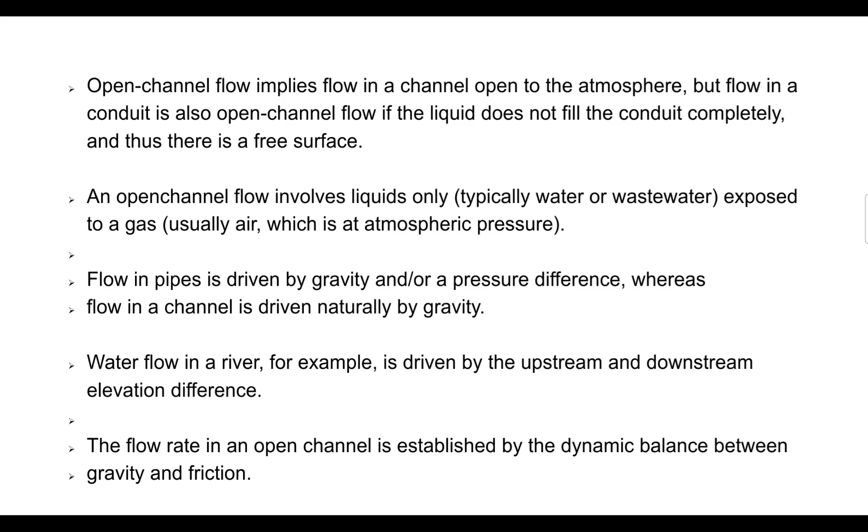So water flow in a river, for example, is driven by upstream and downstream elevation difference. The flow rate in an open channel is established by the dynamic balance between gravity and friction. The reason why there is flow is because of gravity, and the reason why there is resistance in flow is because of friction.

But the height of the free surface from the channel bottom, and thus all the dimensions of the flow cross section along the channel, are not known, so they can change along with the average flow velocity.

The vertical distance between the free surface and the channel bottom, in most cases in natural flow or natural waterways, is not known. Most of the time that's what we solve, or we can measure it physically, but it is a dynamic parameter, so it will change depending on the velocity of the flow.

So that's what's different, whereas in the pipe, there's no depth of flow because the pipe is completely filled with the fluid.

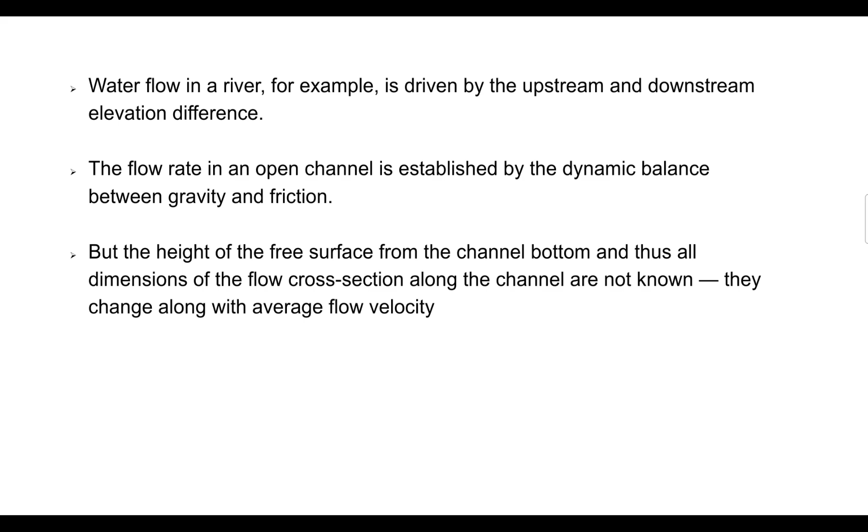In an open channel, the flow velocity is zero at the side and bottom surface. So the flow is zero at this portion. Theoretically zero, the flow on the side. Then it will increase as it gets farther from this side, so the velocity becomes larger. This is actually the velocity gradient of the flow in a typical trapezoidal channel.

The flow is zero because of the no-slip condition in the channel. We discussed that earlier, in the early part of this course and in the previous topic, because of the no-slip condition, because of the resistance of the friction between the water and the wall of the channel. The wall shear stress varies along the wetted perimeter at a given cross section and offers resistance to the flow.

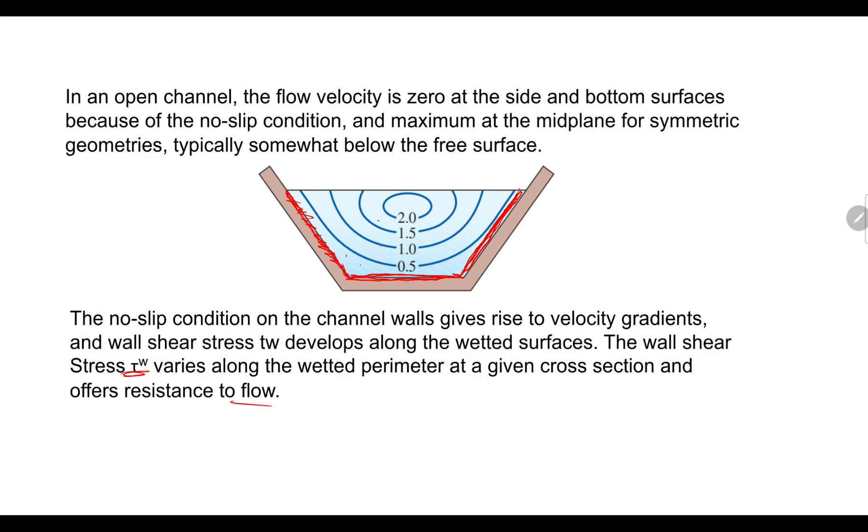The magnitude of this resistance depends on the viscosity of the fluid as well as the velocity gradient at the wall surface, which in turn depends on the wall roughness. So the friction resistance depends on different factors such as the viscosity of the fluid, the type of the fluid, velocity gradients, and of course the wall surface, because the rougher the surface, the more resistance there is to the flow.

Open channel flows are also classified as being steady or unsteady. A flow is said to be steady if there is no change with time at a given location, meaning no change in velocity at a given location over a period of time. The representative quantity in open channel flow is the flow depth or the flow velocity. So if there's no change in flow depth or velocity, the flow is said to be steady. Otherwise it is unsteady.

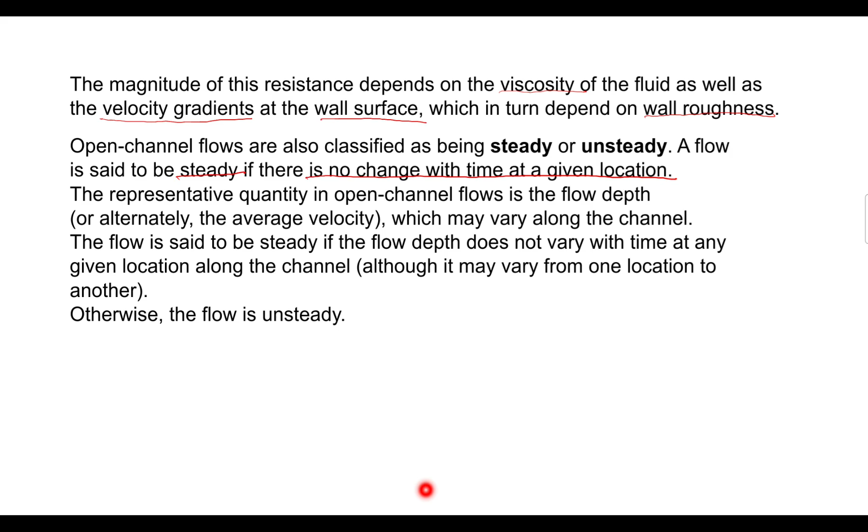Flow in open channels is also classified as being uniform or non-uniform, also called varied flow. This depends on how the flow depth changes with distance. The depth is the vertical distance from the free surface to the bottom of the channel. Depending on the flow depth, we can consider it as uniform or non-uniform flow. The flow in a channel is said to be uniform if the flow depth remains constant. Otherwise, the flow is said to be non-uniform or varied flow, indicating that the flow depth varies with distance in the flow direction.

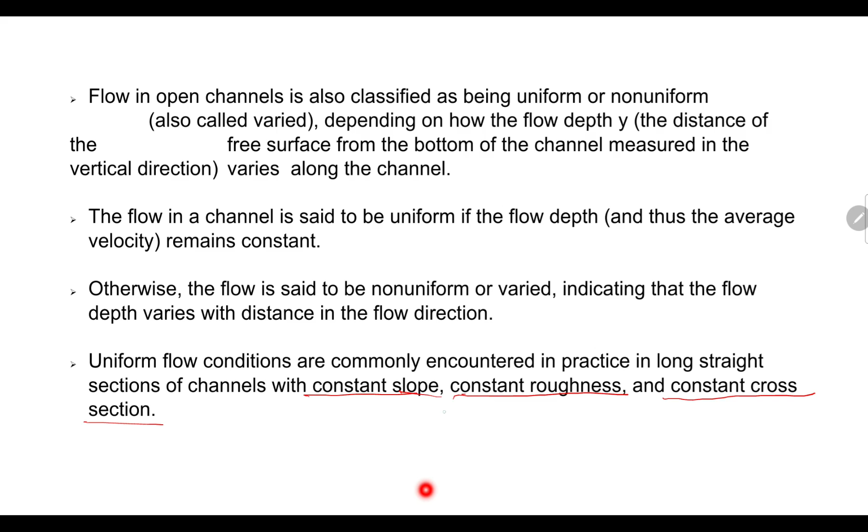Uniform flow conditions are commonly encountered in practice in long straight sections of channel with constant slope, constant roughness, and constant cross section. If the channel has these characteristics, most likely its flow will be constant, so its Q will be constant. So Q1 is just equal to Q2, or Qn, depending on what point we consider.

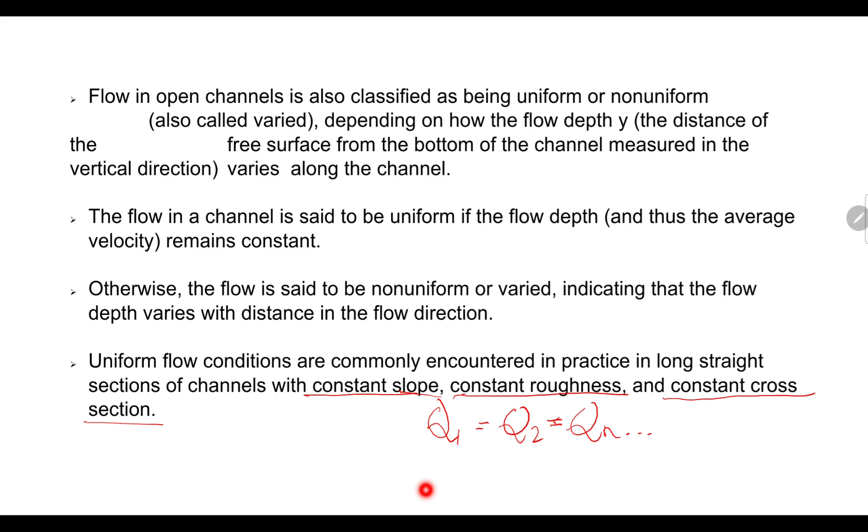In open channels of constant slope and constant cross section, the liquid accelerates until the head loss due to frictional effects equals the elevation drop. So as I've said, the flow is a balance between the gravitational effect and the flow resistance. There will come a time when they equalize, called the terminal velocity, so the velocity becomes constant and the uniform flow is established.

The flow remains uniform as long as the slope, cross section, and surface roughness remain unchanged, so most likely the flow will be uniform. The flow depth in uniform flow is called the normal depth, y sub n, which is an important characteristic parameter for open channel flow.

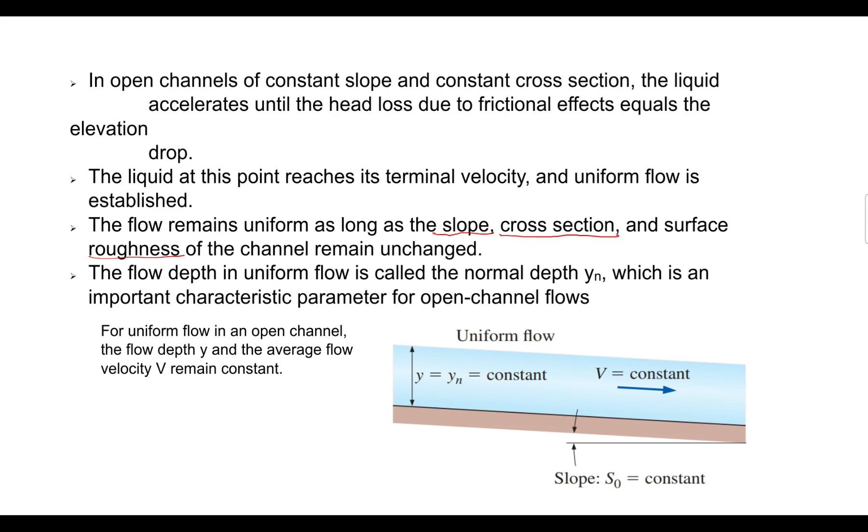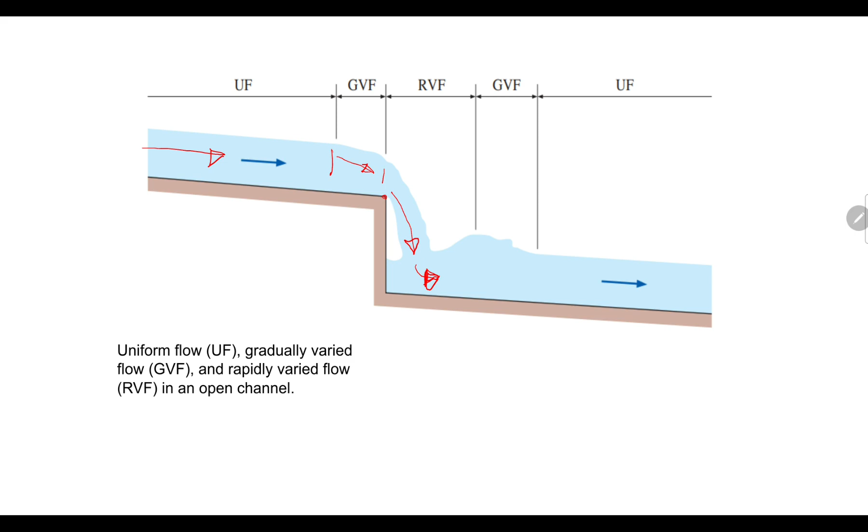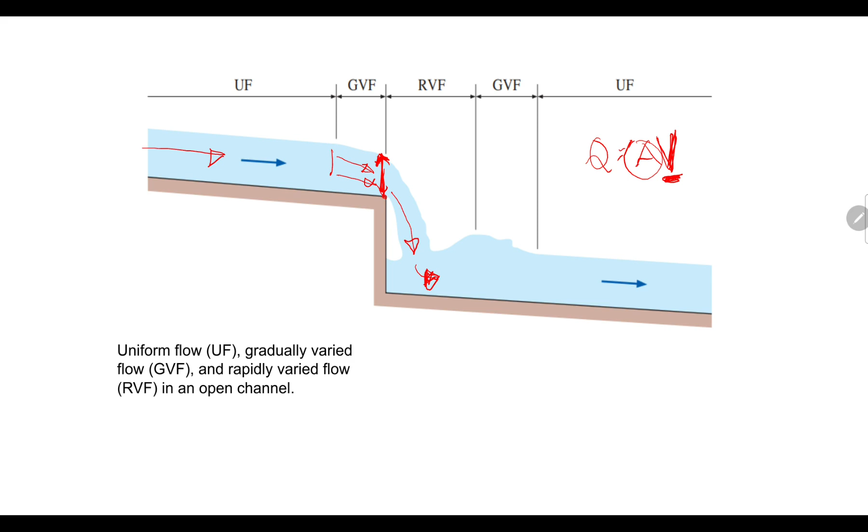We know that Q is equal to area times velocity, so the area is inversely proportional to the velocity. The greater the velocity, the lesser the area. That's why if the velocity increases, the depth decreases, meaning the area decreases. So if the velocity increases, there will be a decrease in area. This portion is what we call the hydraulic jump.

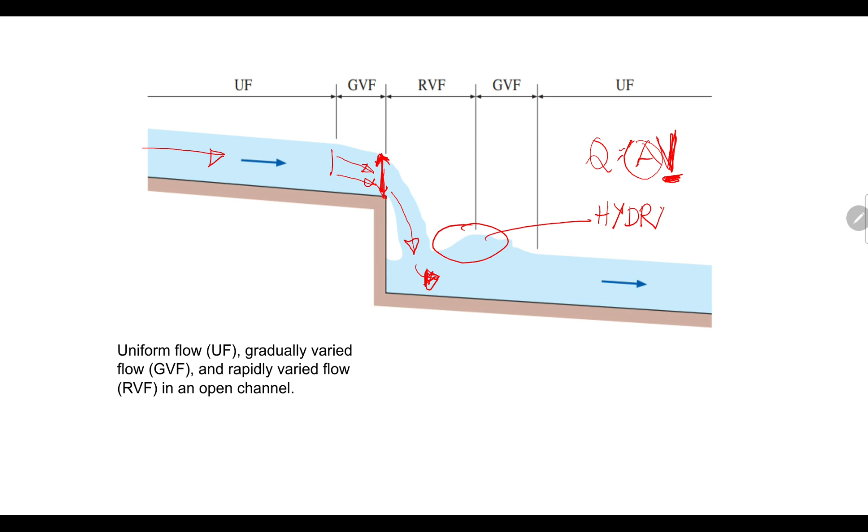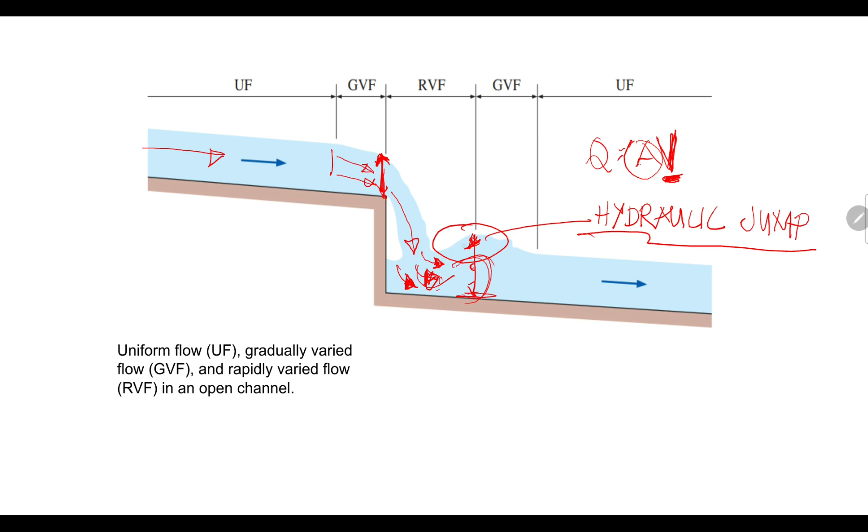Hydraulic jump phenomena occurs when there's a sudden change in velocity, or a sudden decrease in velocity. If you observe, the velocity here is comparatively bigger than in this portion. So the velocity is fast, then there's a change in momentum at this portion, and it suddenly becomes slow.

Because the velocity suddenly decreases, there's a sudden increase in area, so it suddenly rises. That's called a hydraulic jump. From this depth, it suddenly rises, and then going downstream it will normalize again, returning to its terminal velocity as it flows downstream, until the sudden change in depth levels out. That is the hydraulic jump phenomena.

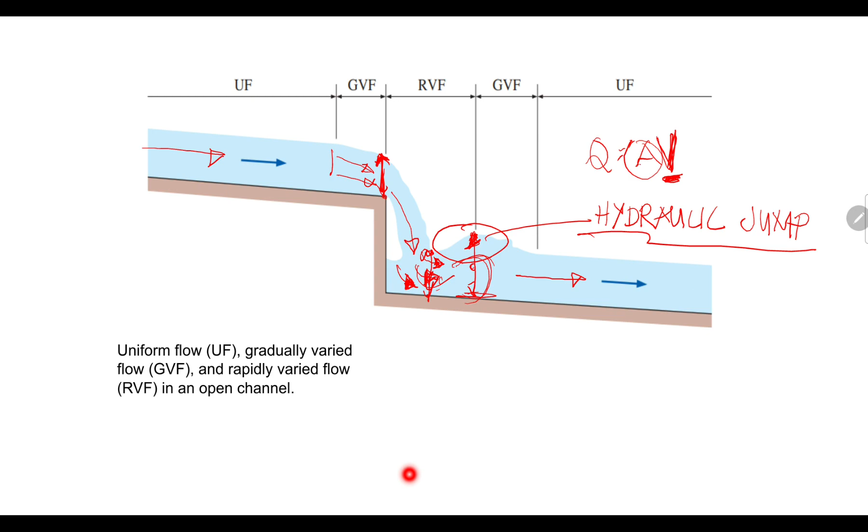Like pipe flow, open channel flow can be laminar, transitional, or turbulent depending on the value of the Reynolds number. The Reynolds number, as discussed previously, is a function of density, velocity, diameter, and dynamic or kinematic viscosity. In an open channel, instead of the diameter, we consider the hydraulic diameter or hydraulic radius.

Hydraulic radius, RH, is the ratio of the area to the wetted perimeter. If you have this channel, this is the wetted perimeter, or the length that is wet. This is the cross-sectional area. So hydraulic radius is the ratio of the area and the wetted perimeter.

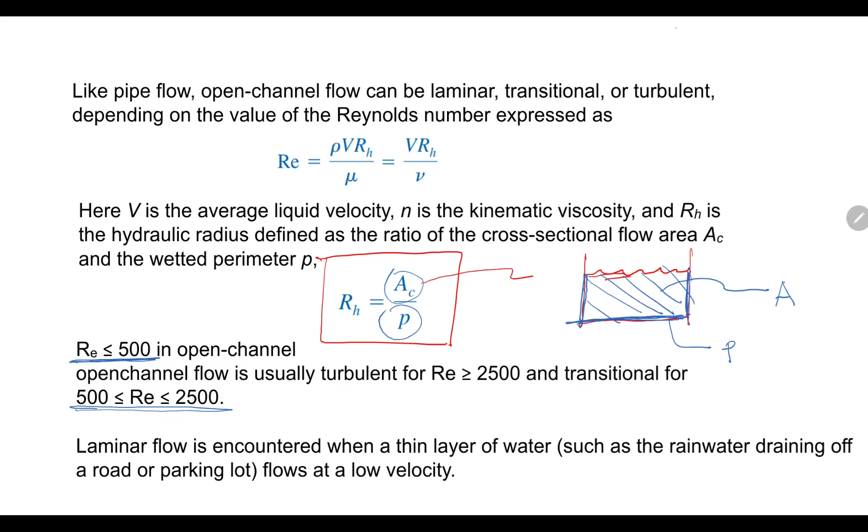If Reynolds number is less than 500, it's laminar flow. Between 500 and 2,500, it's transition flow. If it's above 2,500, greater than 2,500, it's turbulent flow.

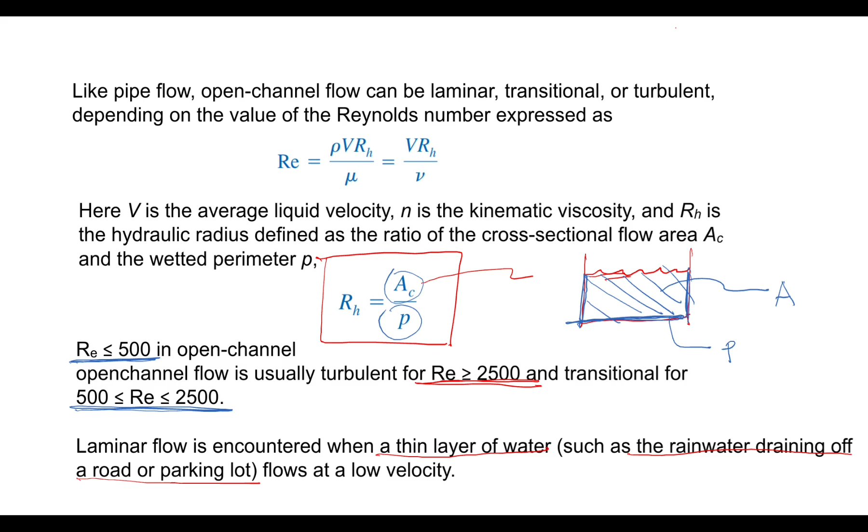Laminar flow in an open channel is very rarely encountered. It doesn't happen often. In most cases, laminar flow occurs when there's a thin layer of water, such as rainwater draining a road, a parking lot, or a similar situation, flowing at very low velocity. But in other flows, such as channel flows or flow in culvert pipes - like flow in a river - laminar flow doesn't happen; it's usually turbulent flow.

In an open channel, flow is also classified as subcritical, critical, and supercritical. The determining factor for that is the Froude number. The Froude equation is velocity over the square root of G times LC, where LC is the characteristic length. LC is taken to be the flow depth Y for a rectangular channel.

The Froude number is an important parameter that governs the character of flow in open channels. The flow is classified as subcritical if the Froude number is below 1, critical if it's 1, and above 1 it's supercritical or rapid flow. We need to classify the flow because in some topics this classification is important. As much as possible, we need to keep the flow critical or subcritical, because supercritical flow has a lot of energy in it.

As much as possible, in an open channel or hydraulic structure, we must see to it that, in most cases, the flow affecting our structure is minimum as much as possible, because high velocity packs a lot of energy. So as much as possible, we need to have minimum energy impacting our structure.

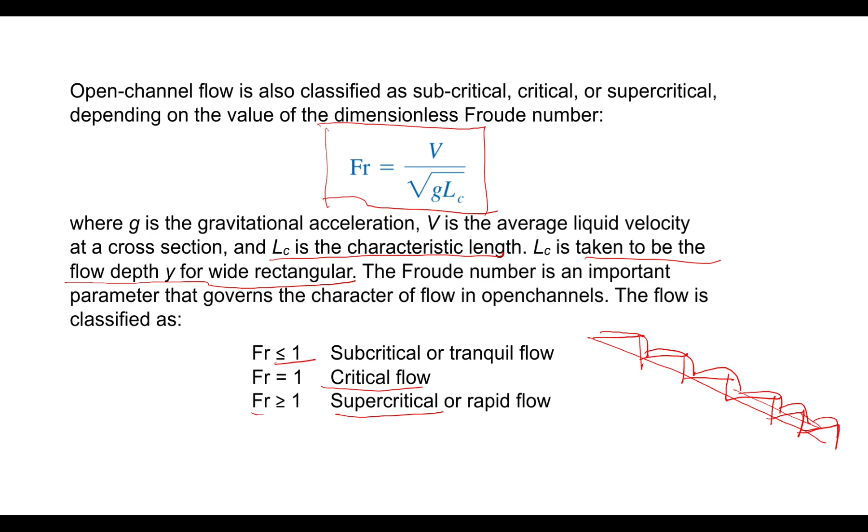That will be discussed in hydraulic structures or your major subject if you choose the track in hydraulics, where the interaction between the energy of the flow and your hydraulic structures is discussed. So the determining factor is the Froude number.

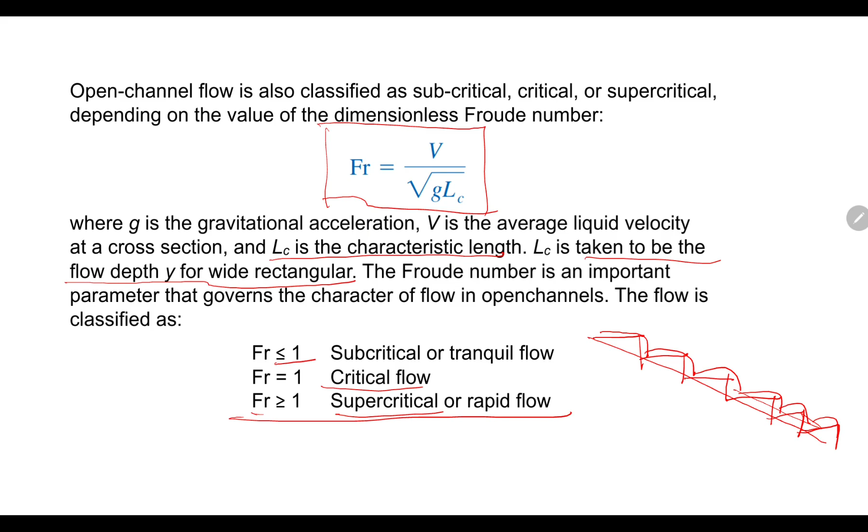Consider the flow of a liquid in an open channel of a cross-sectional area and volume flow rate. In this book I used as basis for this slide, Q is area times velocity. Q is the discharge, and its symbol instead of Q is...

This equation is: critical depth is equal to Q squared over G A squared. Actually this equation is just equal to critical depth equals V squared over G, because Q over A is just equal to velocity, so that's the equation.

This is for the general geometry. For a rectangular channel, y sub c is just equal to Q squared over G. Since it's rectangular, we take out B, the width of the channel, raised to the 1/3 power.

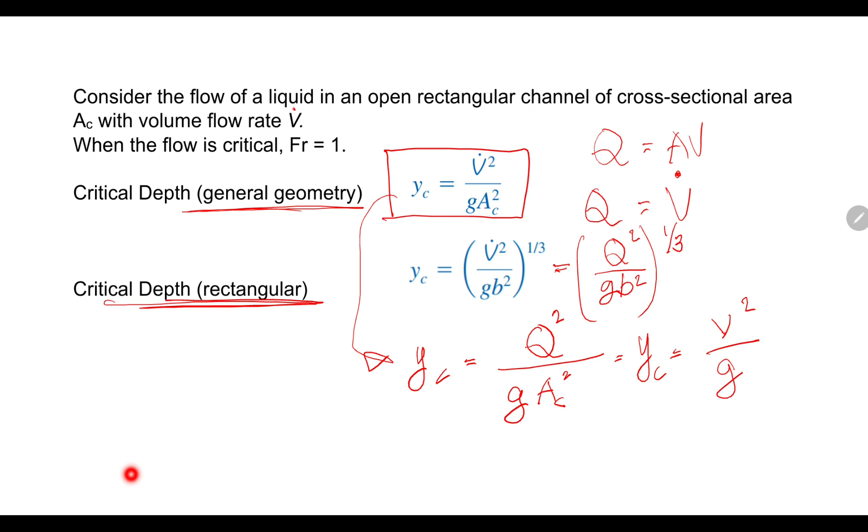The liquid depth y is greater than yc for subcritical flow, and y is less than y sub c for supercritical flow. This critical flow is the limiting factor. If the actual depth is greater, it's subcritical. If it's less than, meaning the depth and area are small, the velocity is strong, so it's supercritical.

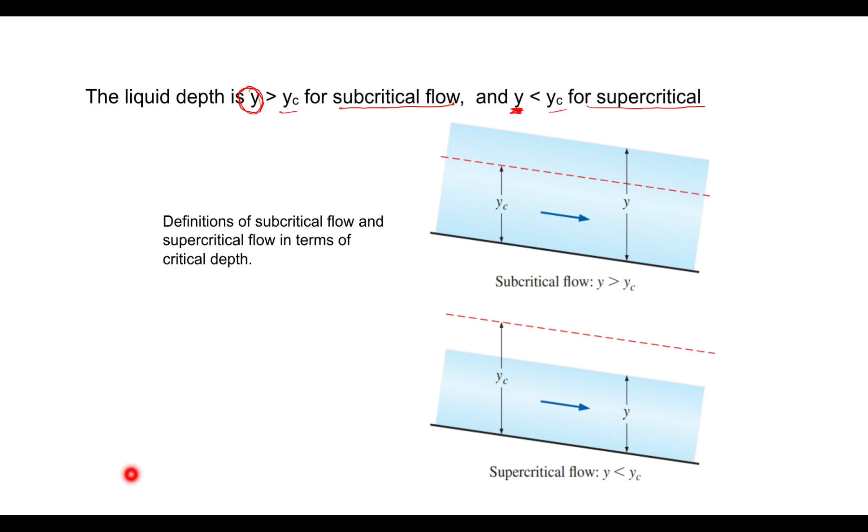The total mechanical energy of this liquid in the channel in terms of head is expressed as the sum of the potential and kinetic energy. If you recall Bernoulli's energy equation applied to pipes, it's the same concept we still use. But what's different here is there's no pressure term - instead of pressure, it's replaced by depth y. So we still have elevation, and kinetic energy, the energy of velocity, V squared over 2G.

The total mechanical energy of the fluid in terms of heads becomes the sum of the pressure and dynamic heads. So the sum of the pressure and dynamic heads of the liquid in the channel is called the specific energy, ES. So this is the specific energy of the flow: Y plus V squared over 2G, the depth and the velocity.